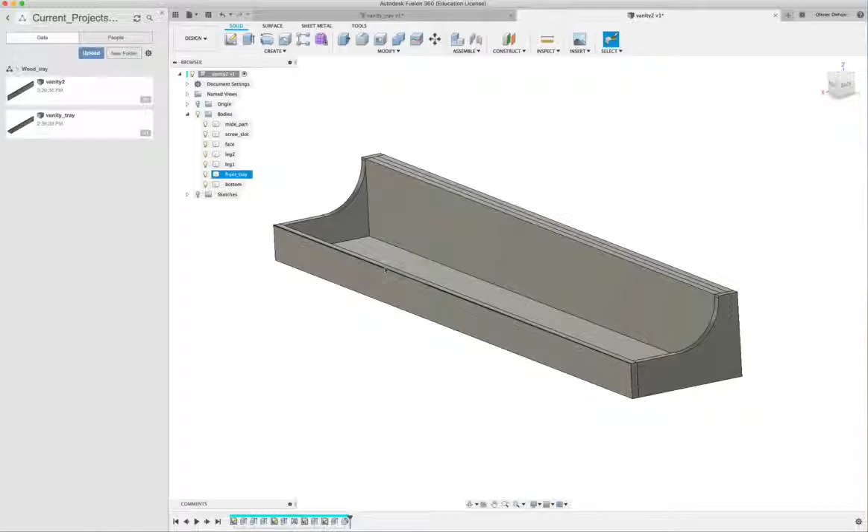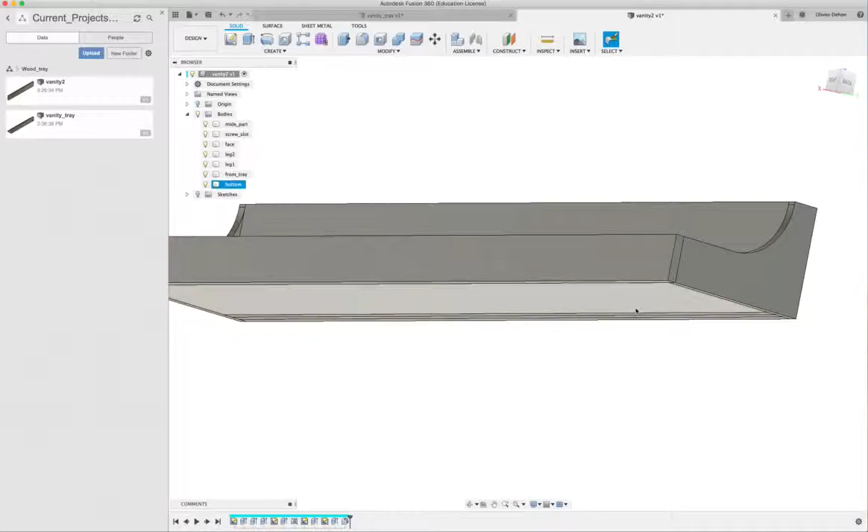So for example, if we cut this piece of wood, that piece, this piece, when we're going to assemble them, we're going to have to be careful of making it nice and square, and it's not necessarily going to be as easy and straightforward as you can think. So usually what you could do is have, for example, this part having a little bit of a slot, this part here extending into this part, making a little slot here and a little slot here, like a tenon and mortise setup.

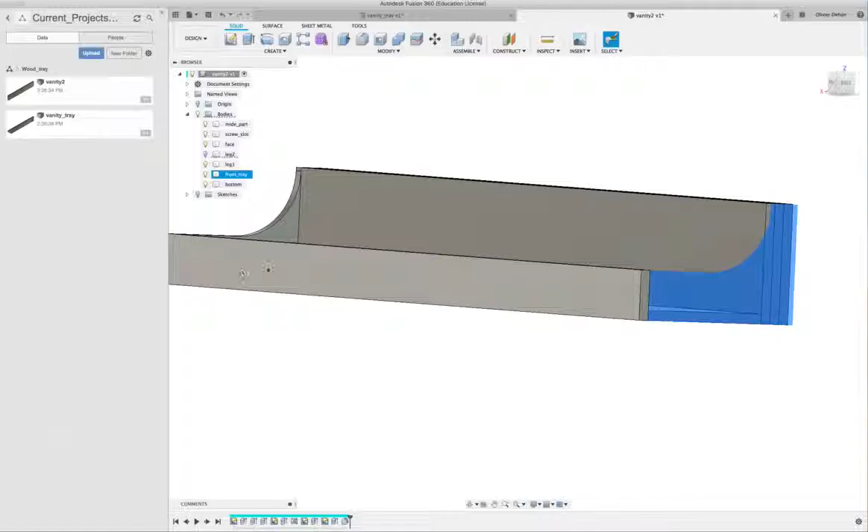So why don't we try to do that? So I'm going to pick this one, and as you see, when I click on here, it highlights its leg 2, so I can switch that leg off, and that gives me access to see this part and this edge, and I'm going to try to draw on that edge. So I'm going to create a sketch on that edge. It rotates the whole design.

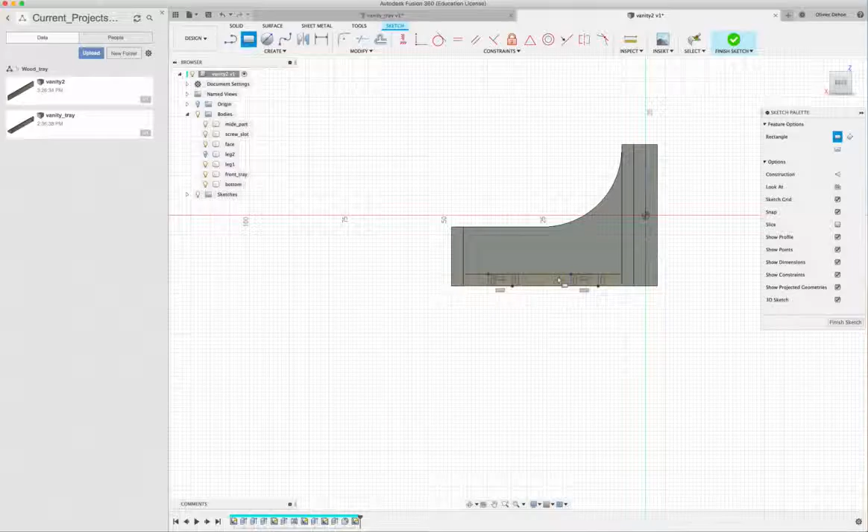I'm going to make a rectangle that goes from here to there, and a rectangle that goes here to there. I can zoom in. I can say that the dimension between this and this is going to be, let's say, 6 millimeters. The dimension between this and this is going to be the same, so I'm just going to pick that one so I can make a reference to this dimension.

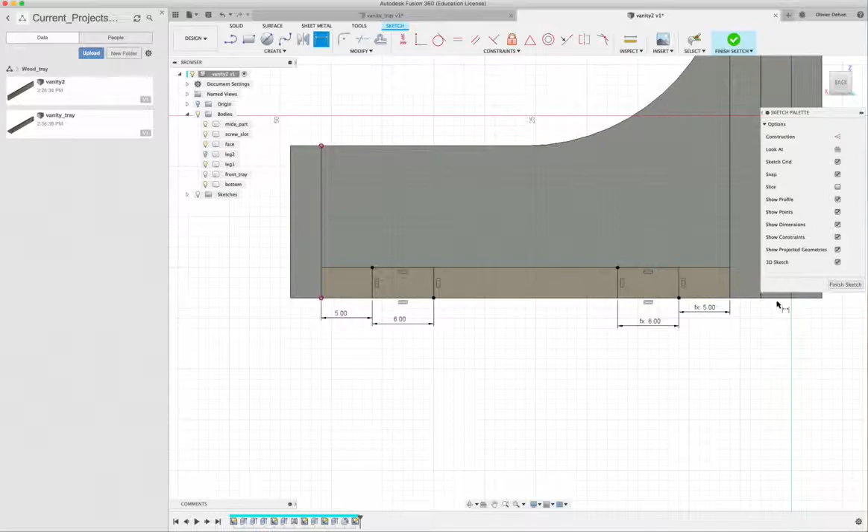And then what I could do as well is create a parameter that is tab size, for example. I'm going to do the distance between this and this, and make it 5, and the distance between this and this is going to be the same. Okay, so I'm now fully constrained, and I'm going to extrude this part and that part out of that part. So I'm going to finish sketch.

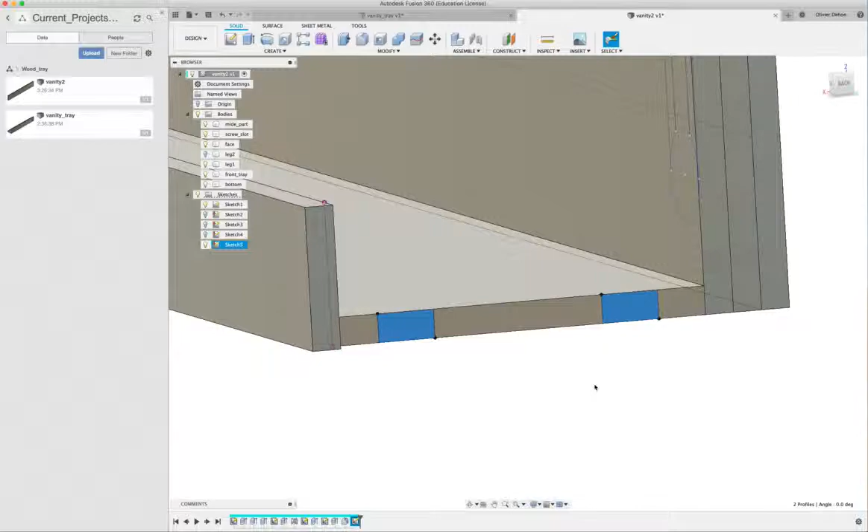The reason why we're not seeing anything is because the sketches are off. Let's have a look on the side here, and essentially I want to use this part and this part, so I'm going to escape this, shift this, extrude. I'm going to extrude out 3 millimeters, which is the thickness.

Again, here I could use the join, but here's a little trick. If I use new bodies first, you can see in a second why I'm doing that. I've now created 2 new bodies that are small pieces off this part.

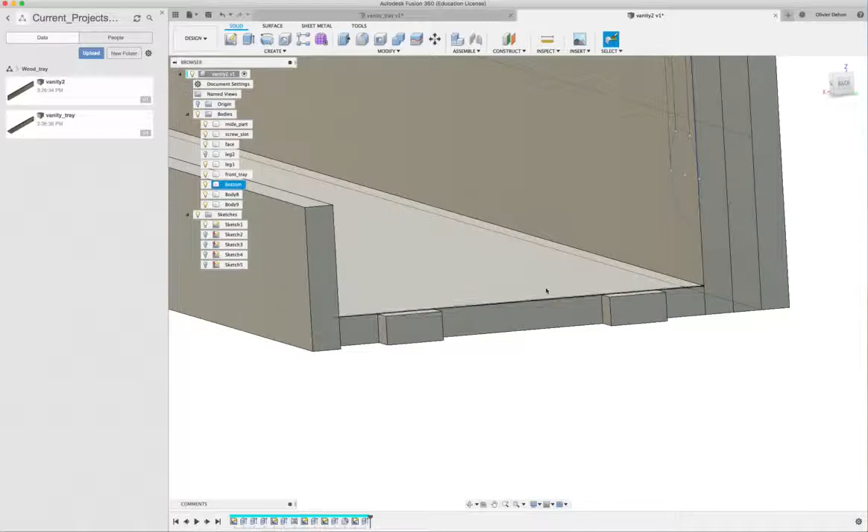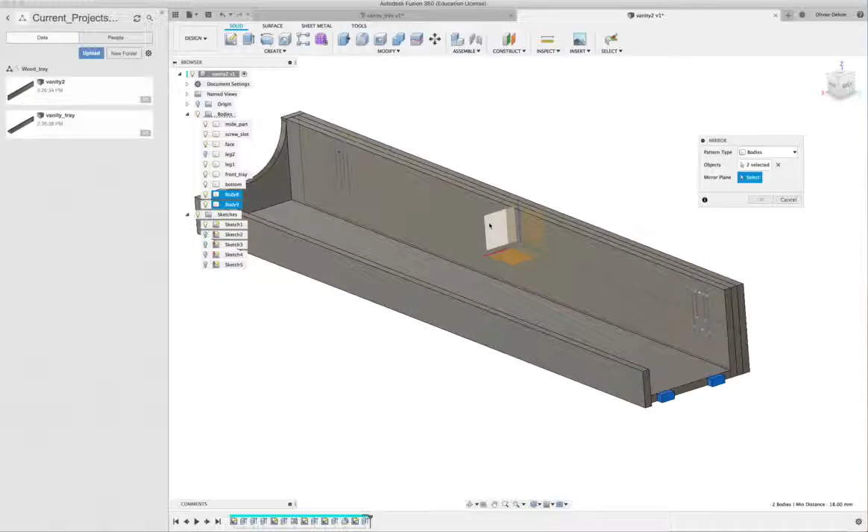But back to the fact that we want to always design with symmetry, I can then also create a mirror of bodies, pick this one and that one, 2 bodies selected, then take a mirror, take this one as a mirror, and I'm going to create these parts as well over there. Say OK, and so clearly this tray has got now these little things sticking out of them.

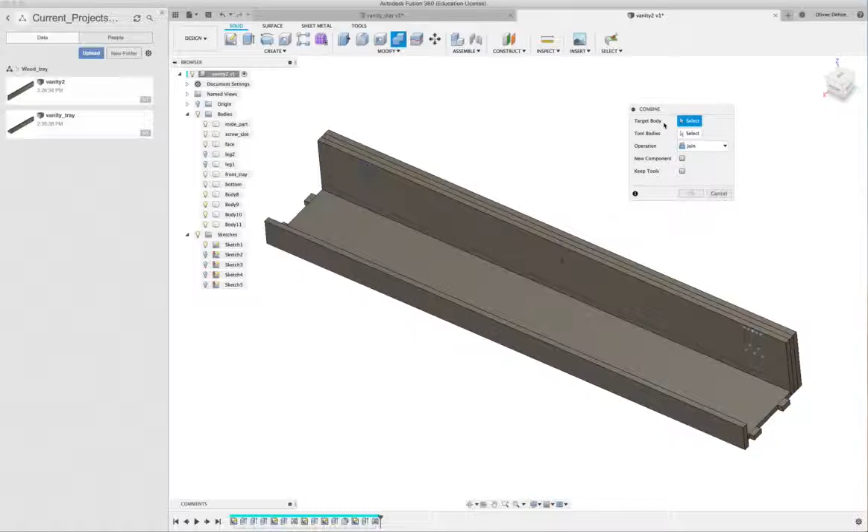Clearly we want all this to be just one part, so what we can do is go into modify, there's something called combine. It's a very powerful tool here which allows you to say what the body is, so it's going to be this body, and then the tools are going to be this, this, this, and this, by the way, here. In this case I do want to join all these parts together, and let's forget about this for the moment and just say OK.

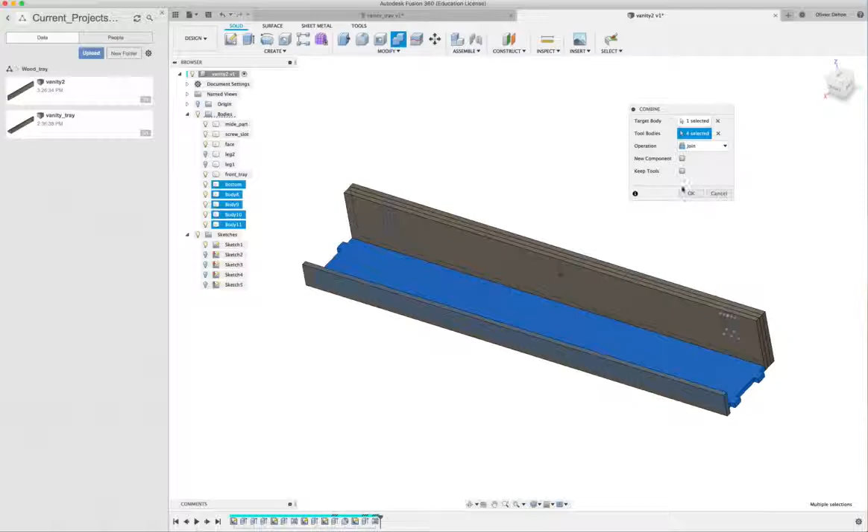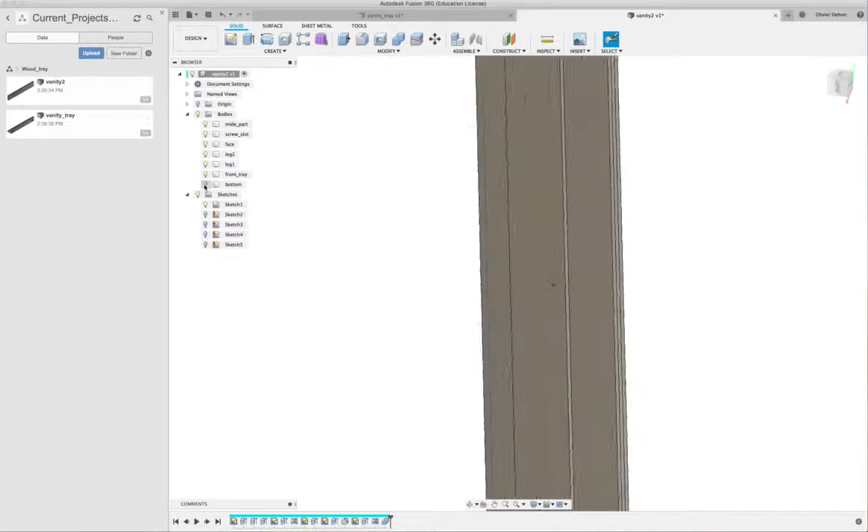So I've now created, so all these little bodies that were created over here have disappeared. This has been merged into the bottom tray. Now we want to cut out of the legs these parts, because although it seems to be like that way, if I switch off the bottom, actually this just hasn't cut anything into that part. Okay, so what we want to do is do that cut.

So this time what we want to do is do another combine. So combine, this time the target body is this part, and the part that we're going to use to tool is this one, and it's not going to be a join, it's going to be a cut.

And clearly I want to keep the bottom, so I want to keep the tool and say okay. So now what's happened is that this part has been cut using that part, so we can prove that by just switching off the tray, and here we go, cut has been done. Clearly we haven't done it on the other side yet, so I'm going to do it again.

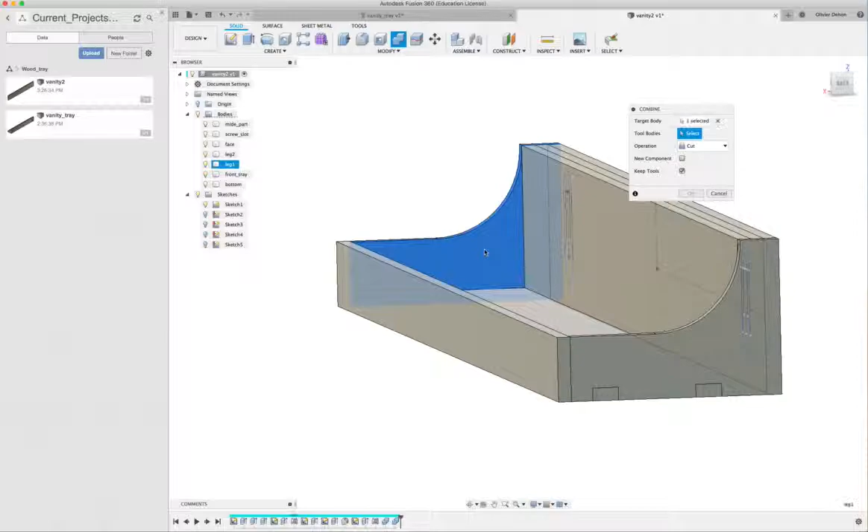So I'll go modify, combine. This is my target body, I'm going to use this to cut, I'm going to keep, and it remembers the previous cut, so this is quite useful. Here we are, switch off the tray to make it better. Okay, so that will ensure that these parts slot exactly in the right place.

What we could do is something similar with the bottom, with the front part and the back part. So I'm going to switch off this front tray, then I'm going to pick this face, right click, create a new sketch, bang, do exactly the same concept. So I'm going to do a rectangle, I'm going to go here to there, here to there.

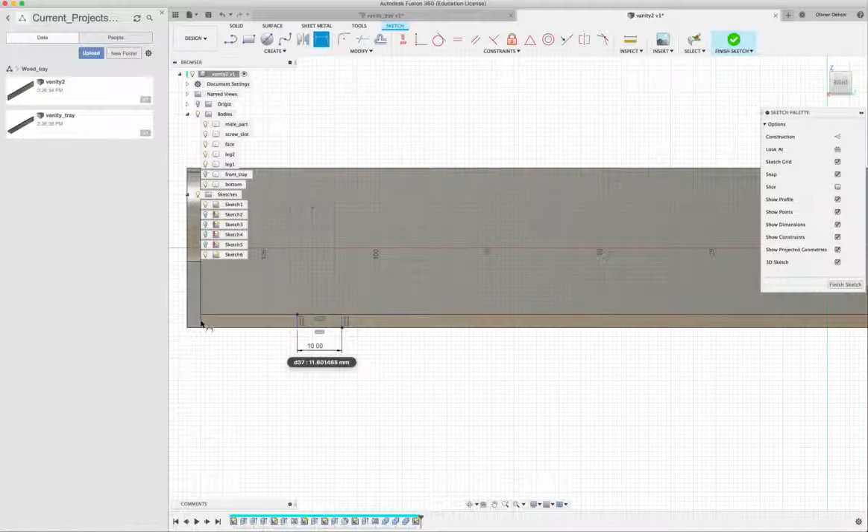I'm going to zoom in. By the way, I could use again another dimension, D. I could use another symmetry to do this. I'm going to make these tabs a little bit bigger, 10, and I'm going to make the distance between this and this as well, 10.

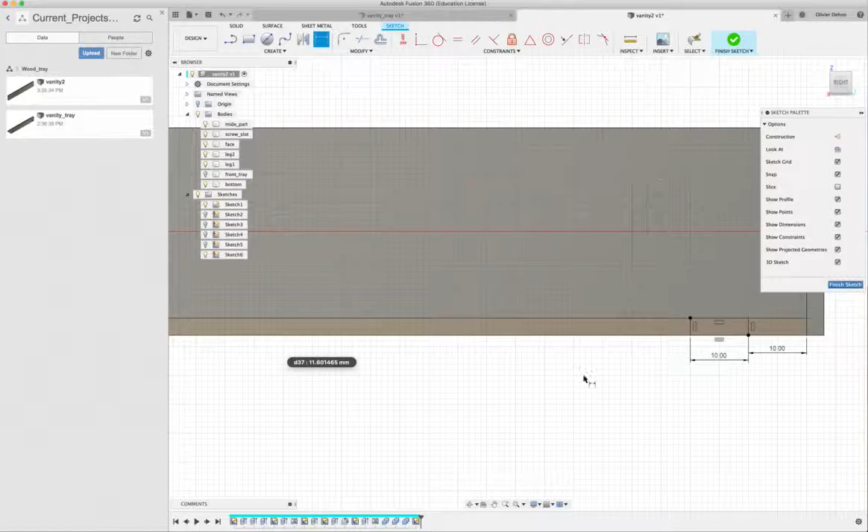And then I'm going to go on here, I'm going to do this, 10, and then the distance between this and this, 10. There we go. Finish the sketch. Switch on the sketch to be able to see what I'm doing. I'm going to extrude this and extrude that. Shift key down. Extrude for 3 mil.

Do it as new bodies, remember, because we're going to do a symmetry. We've got 2 new bodies that appear here. And then I'm going to go do a mirror. Create mirror. Select bodies, this one and that one. Oh, I haven't got a mid-plane, so I can't do that.

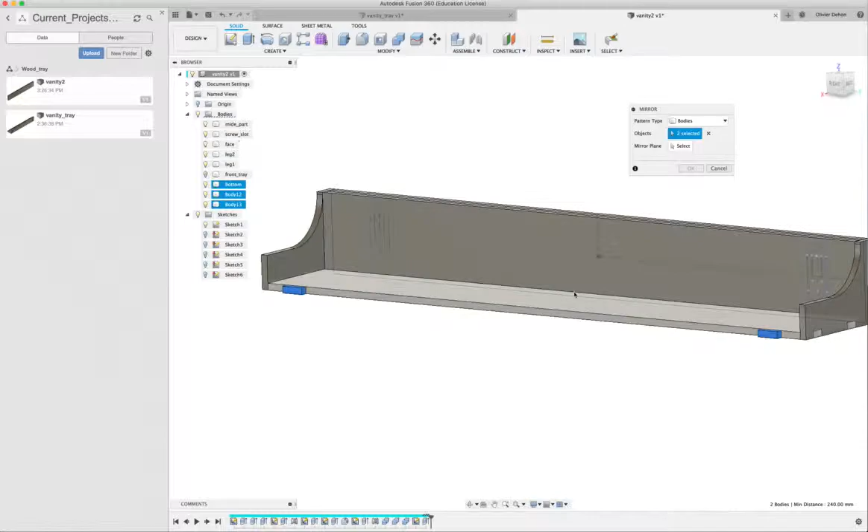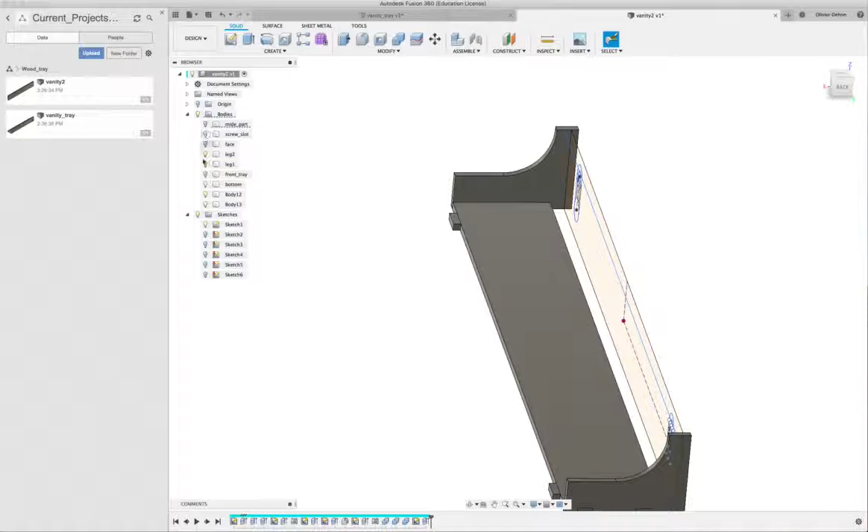So what I'm going to do is I'm going to create a mid-plane between this face and the face that is hidden here. So this part is face, switch these off, keep the leg, this one's mid part and screw slot. Okay, so what I want to create is a plane which is in the middle of these two.

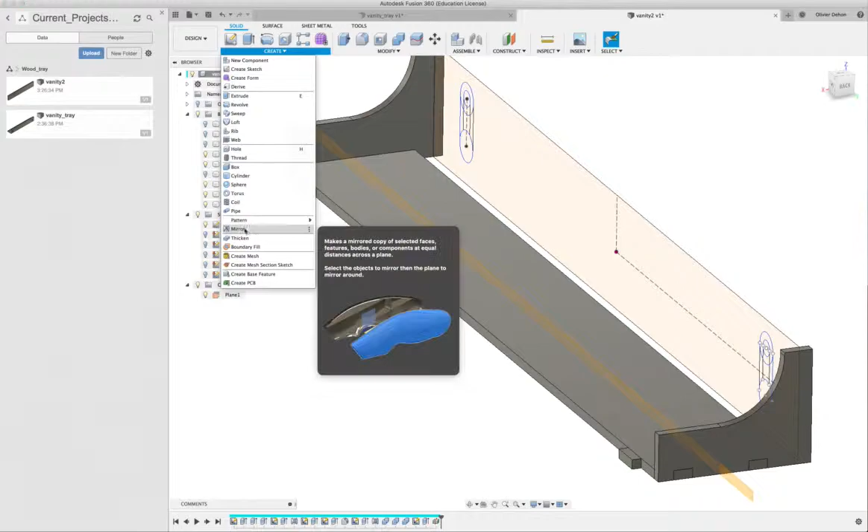So I can do a construction mid-plane between this plane and that plane, and suddenly a plane has been created. Say okay, it appears in my construction area here, and I'm going to be able to pick that plane for my mirror. So I'll go back, say create mirror, pick this body, that body, click on here. This is now the plane I want to use. Say OK. Now I have this part.

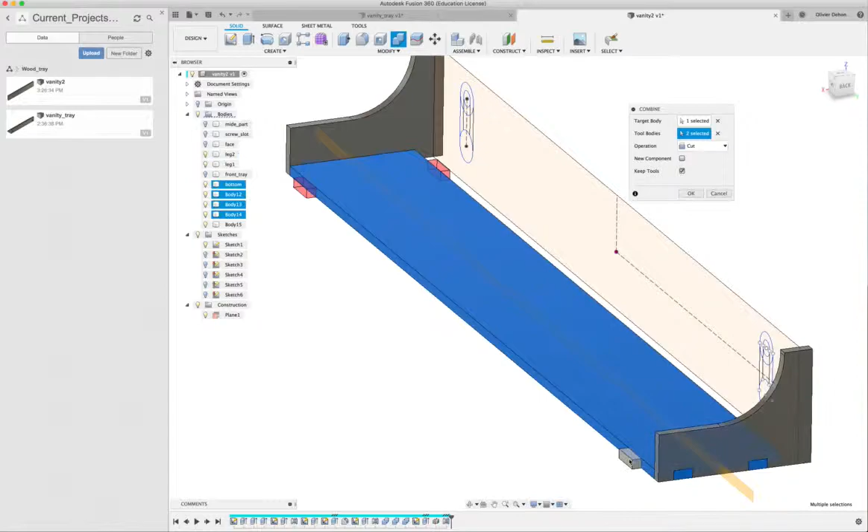Remember, I want to join it all up. So I'm going to go modify, combine, take this part, this one, this one, this one. It's going to be one more down here. Okay. So it's all joined. This case I don't want to keep the tools, switch that off, say OK, bang, OK.

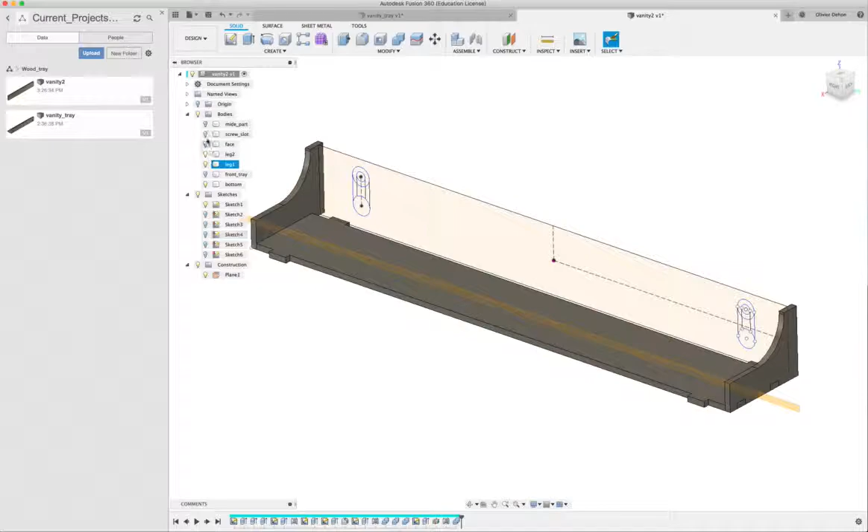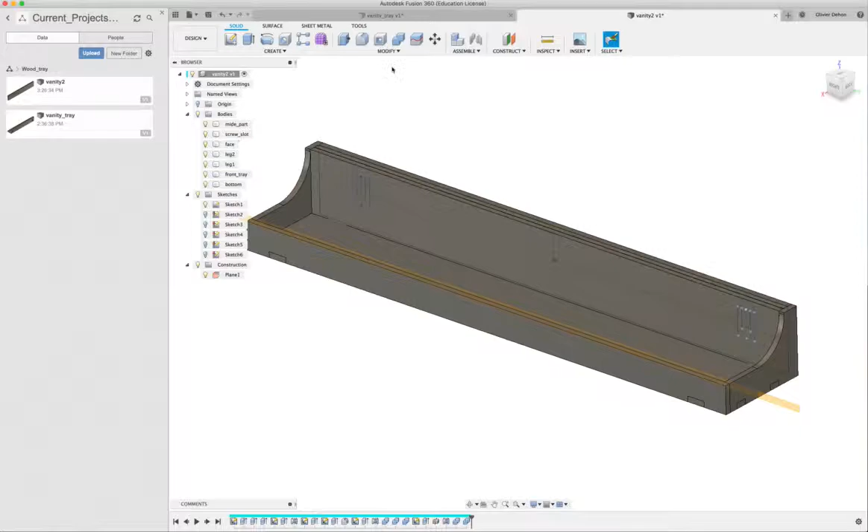And now I'm going to have to use this part to cut out from the face and the other parts. So front of the tray, modify, combine, this is going to get cut by that one. I'm going to say cut, I'm going to keep the tool and say OK. And then this one, combine, this one is going to get cut by that one, bang. Switch off sketches, and here we go.

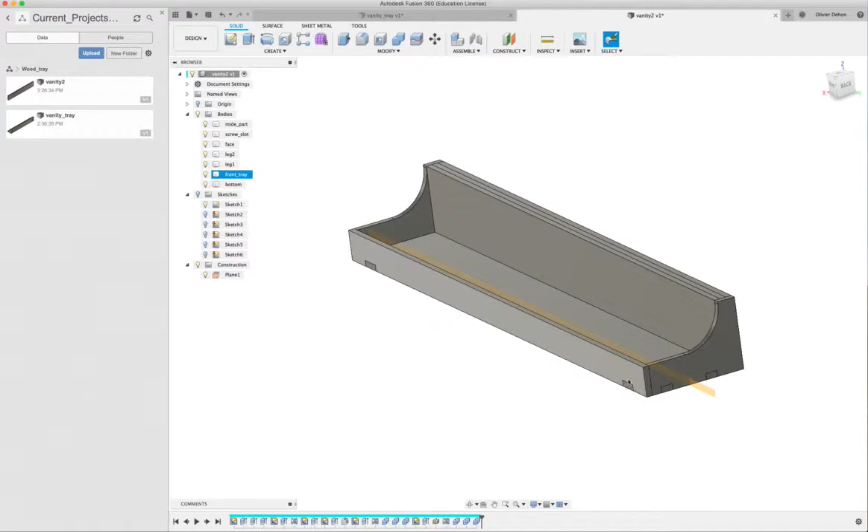I now have this part slotted, so when I'm going to glue it, it's all going to glue nicely. There's enough glue there and it can't slide that way, and it can't slide this way. Maybe I could do a slot as well down here to keep these parts all nice and square, but I think you've got the idea of what I was trying to do. So I'm just going to stop this video for the moment.